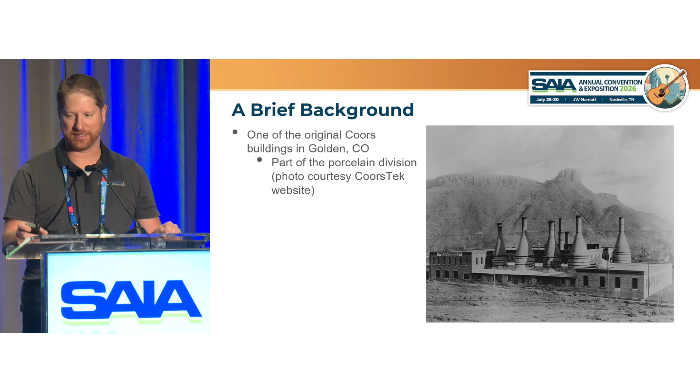So a brief background. So this is one of the original Coors buildings out in Golden, Colorado. They actually did a lot more than just make beer, especially during Prohibition. They had to do ceramics and a lot of industrial materials, things like that. So this is what the building originally looked like. And what the Coors family wanted to do is they were tearing down the building and turning it into a mixed-use kind of parking garage, residential, retail, that kind of thing.

But they really wanted to preserve the existing exterior wall. It was kind of one of the first buildings on the site, and they really just liked the way that it looked. So they kind of tasked us with trying to maintain that as they did all their demolition operations. So this is a joint collaboration between us and JKS Industries. JKS Industries is a demolition contractor based out of Colorado, and they mainly do a lot of bridge demolition work, is kind of how we got to know them originally.

Now they're doing a lot more work out at Coors with demolition plans, but this was a pretty big one that kind of carried a lot of risk with it just because of the historic nature of the building. But working with them for a number of years, they trusted us, and we actually had quite a bit of fun doing it. So here is the main thing.

What was the challenge? In Golden, Colorado, there are essentially two roads that run from the north side of Golden, which is where all the houses are, to the main part of Golden, which is where the downtown, the Colorado School of Mines, and the actual Coors Brewery and the whole Coors complex is located. One of those streets is Ford Street, and Ford is where they were doing all the demolition. The building kind of off to the left next to the green line is what had to come down.

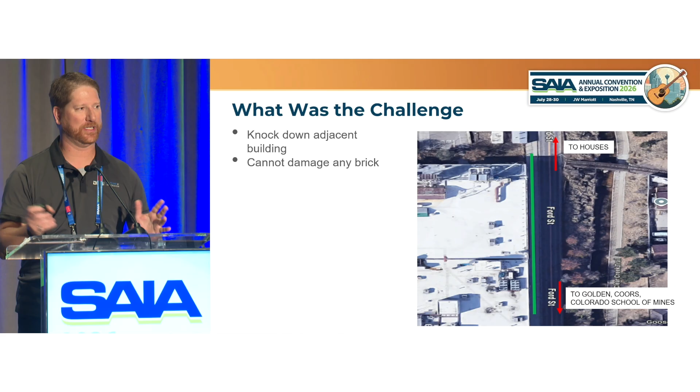So the biggest part is, again, it's a historic building. Coors really wanted to keep the look of it. You can't damage any brick. Everything has to maintain in place. They don't want anything coming out. They don't want it broken or anything like that as they're doing their demolition operations, so the whole thing has to stay in place. It's also got to withstand all types of Colorado weather, and in Colorado, weather changes very frequently, so we have to kind of account for that, especially the wind in Golden.

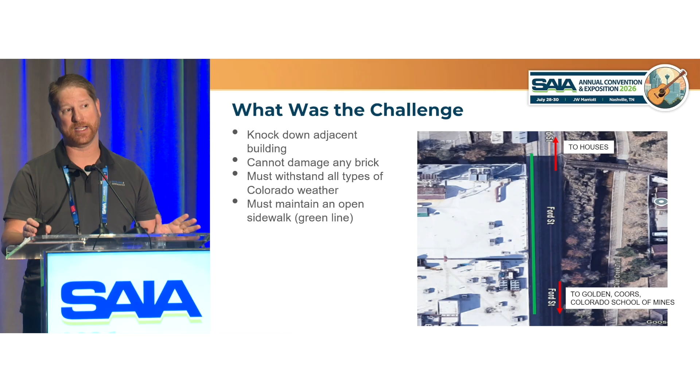The green line is a sidewalk. And again, this is kind of the main way that people that live on the north side of Highway 58 get down into Golden is they walk along the sidewalk. Sometimes, depending on how much they've had, they might stumble back to their house. But we had to maintain that sidewalk open at all times. It's also a 2-lane road, so we can't really have anything that encroaches out into the road.

We also can't brace to the inside of the wall because that would have been way too easy because they have too many other operations going on inside there. Even if it was just demolition, we probably could have done something to account for that, but they had too many other things with constructing the new building, so we couldn't have anything on the inside.

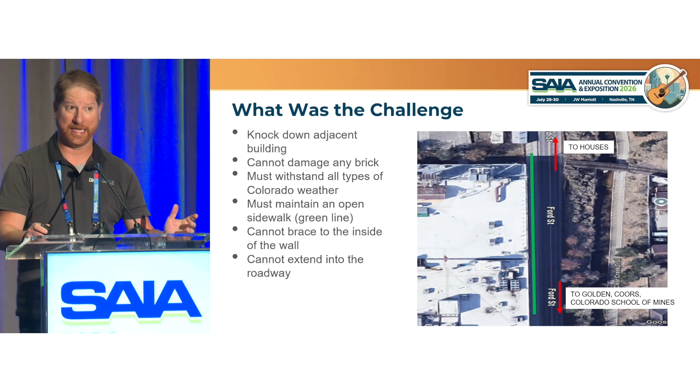And again, you can't go out into the roadway. So here is basically how the project looks. You can see it's just what I would consider kind of a simple brick wall with a Coors name up at the top of it, but they really, really wanted to keep it.

So again, it is kind of a narrow 2-lane road, and then you have the sidewalk on the left side that's adjacent to the building that had to stay open at all times. They couldn't close that down, otherwise it was going to be a main issue.

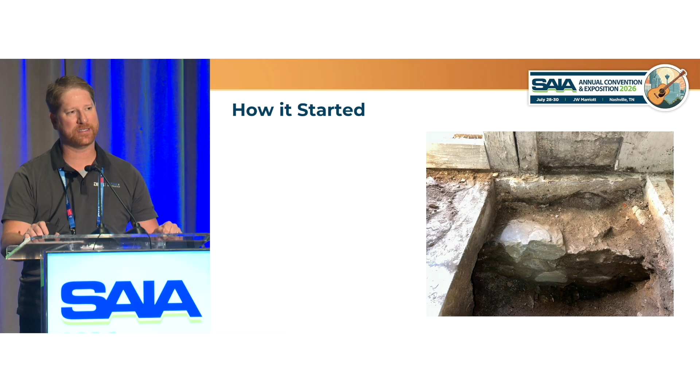So how it all started for us is as JKS was getting ready to do some of the demolition, they started taking out some of the slab on grade and said, uh-oh, we have no idea what this is. It actually turned out to be large cobblestone foundations. Wasn't concrete or anything like that. It was big rocks, and nobody really knew what to do.

So they called us up to say, hey, how do we at least kind of get this thing stabilized and make sure that it's not going to come down as we start pulling down the rest of the building with it. So that's really what kind of kicked off this whole project for us, is to look at the foundation, and then it kind of became, what do we do with this wall?

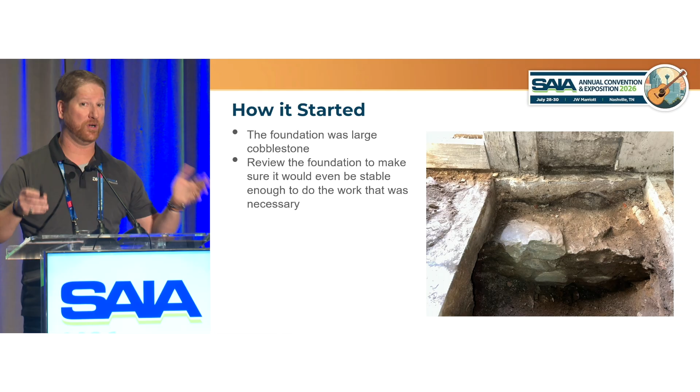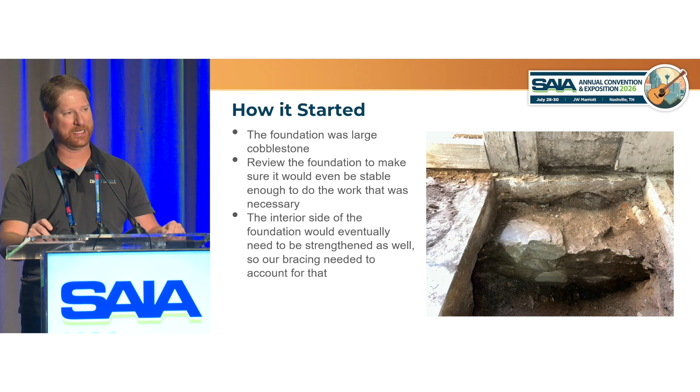At one point, one of the ideas was actually to cut the wall into sections, truck it off-site, bring it back to the site, and put it back up in sections almost like precast. We decided that was not a good idea, so we went with bracing. Again, the inside of the wall, because of this cobblestone, needed to be strengthened. They were going to add grade beams and additional foundation elements after the fact. So again, we couldn't have anything on the inside to get in their way.

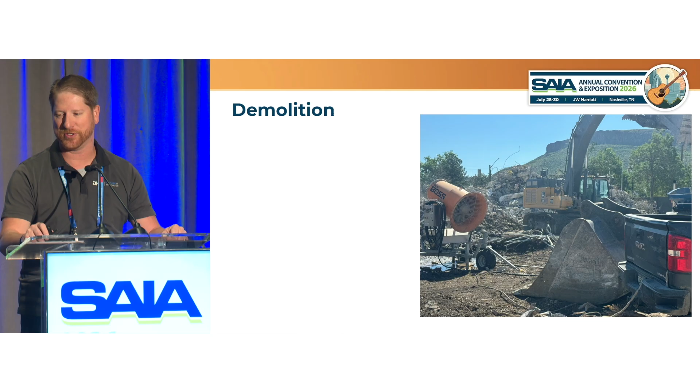So the demolition, the fun part. JKS, again, they do bridge demolitions. They like to be surgical. It's essentially just giant excavators with buckets and shears and hammers and things like that. So all of the demolition was performed from the inside of the building using all these large machines. There was nothing small out there whatsoever. Everything was done by very skilled operators using the large excavators on the inside.

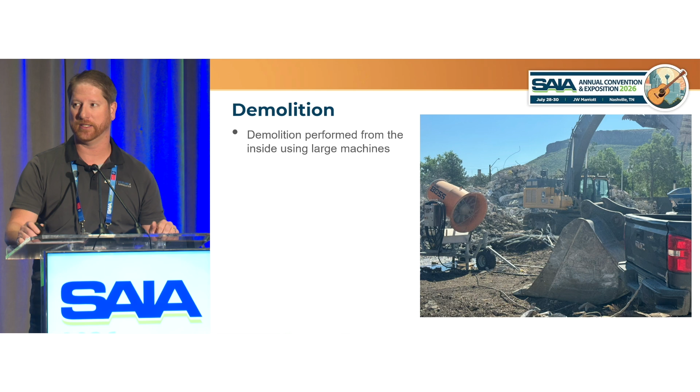The way they did the building is the reverse of how they built it. So they demoed it from the top down. They didn't want to try to pull columns from the bottom and kind of let it come down. They wanted to basically take it apart piece by piece from how it was originally built.

And part of that also meant they had to pull out a lot of the main support beams that ran into the pockets of the brick wall. So they were very, very careful pulling them to make sure they didn't pull the brick with it, because, did I mention, you can't disturb the brick wall whatsoever.

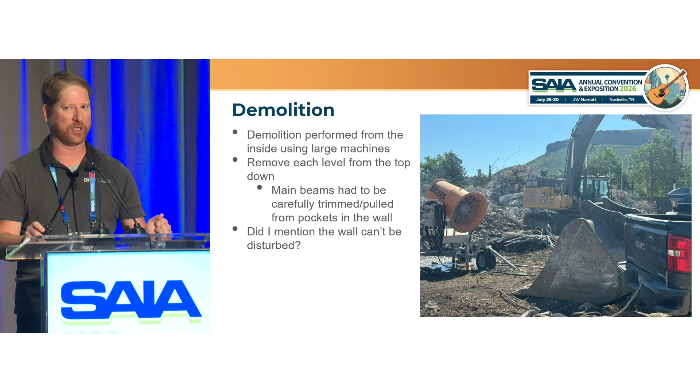So the way we approached this is we started by making sure the wall was actually secured. What we did is, with a 100-year-old brick building, we essentially designed a steel exoskeleton to go on the outside of the wall. We used steel beams, just I-beams vertically, and then for the time being, we had timber members with coil rod going through there to essentially squeeze the steel members on the outside and inside of the wall, creating a bit of an exoskeleton.

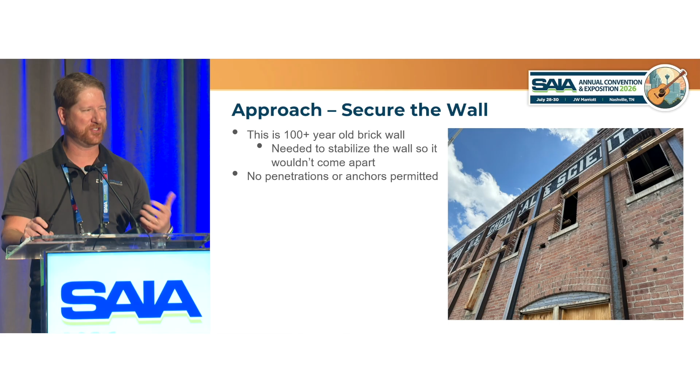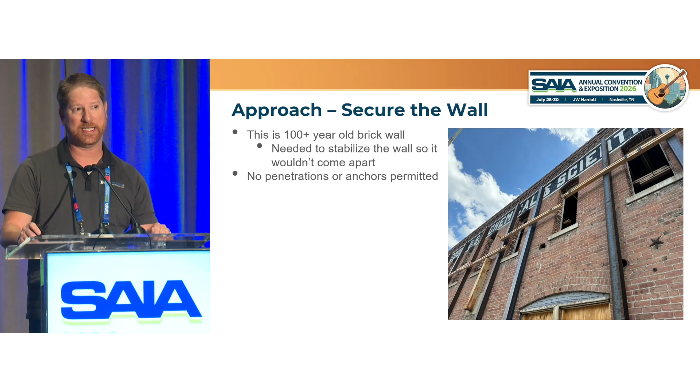Part of it too, they didn't want any penetrations, no kind of anchors into the wall, because again, they didn't want to have to go back and try to fix something when they were done. So the nice thing about this building, there's lots of windows, lots of door openings. So we were able to get quite a bit of coil rod to go through without having to actually drill through the existing wall.

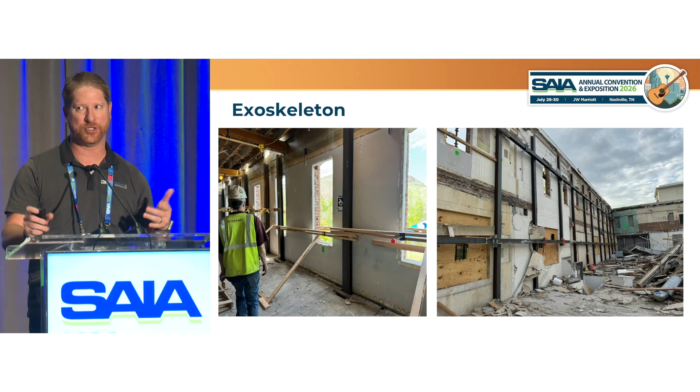So again, we had all these beams out there, and then this is eventually what it looked like. So what we started with was kind of the picture on the left. While the building was still standing, they cut open holes in the roof, dropped down these vertical steel beams, kind of held them in place with timber and some coil rod, and then you can see in the picture on the right everything is demoed out, and we have horizontal walers going through there as well. Everything is connected, so it's all actually functioning as one giant piece of wall without the rest of the building around it.

So what we decided to do is essentially use system scaffold, and we created another almost mock building on the outside that we could start attaching everything to. So the nice thing about it, the sidewalk was extra wide. I think it was about 10 or 11 feet wide, so it worked out really, really well for us to get everything in there. I will say with the final layout, everything was pushed basically right to the edge of the curb, which is where they had that vehicle barrier.

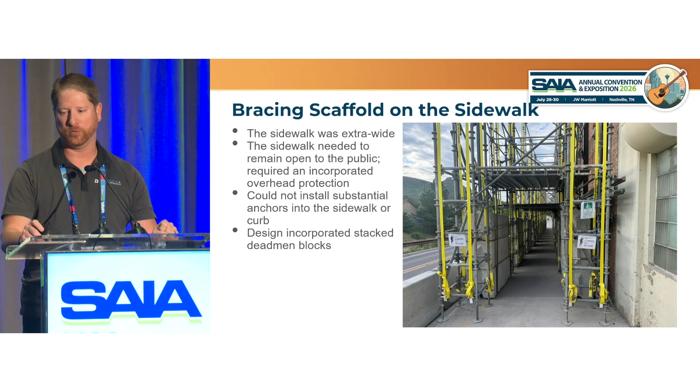So instead, what we used was stacked dead men concrete blocks. So on the inside, there's 3 blocks on each side. They brought them in on a truck, unloaded them with a forklift out in the road, and then basically sent the truck on its way, again, to try to minimize any kind of street closures. So everything had to be done very, very quickly and set into place.

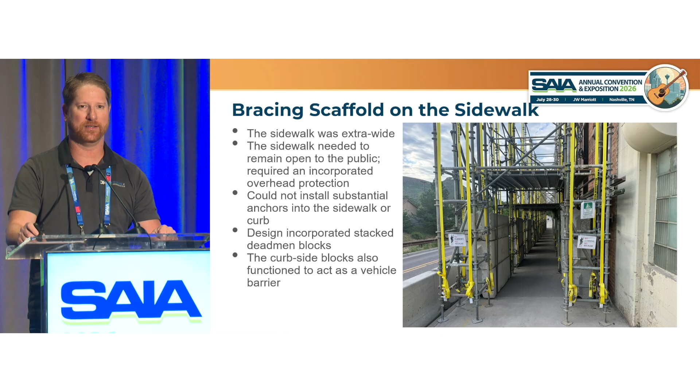And then the nice thing is that even though they had this K-rail on the outside, right up against the gutter of the curb, all these dead men blocks also acted as a vehicle barrier just in case somebody got a little sideways, and they didn't want somebody running into the scaffolding to tear it all down because it's also still actively bracing the wall and didn't want to have all of it go with it.

So it kind of ended up looking like a giant jungle gym of not only scaffold parts and pieces, but a lot of straps. So the other thing too is they used the straps to hold down all of the dead man blocks, because we ran some numbers and found that having all of that concrete weight at the bottom of these things was probably going to do quite a bit of damage to the runners. So we said, okay, we'll set them on the ground and we'll just run straps around everything, run them to the tops of the legs, so that way all that load is still concentrated into the legs and the runners are really just acting to space everything out.

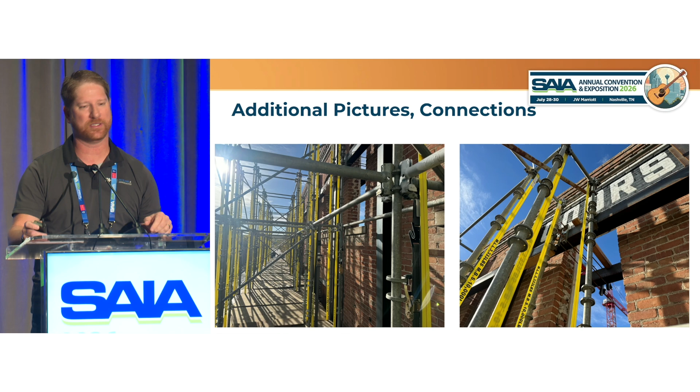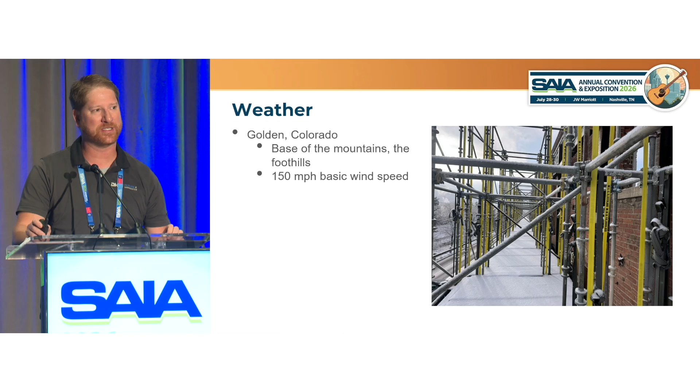Again, with Golden, Colorado, it's at the base of the mountains in the foothills. It is in a special wind region, so almost that one street, Ford Street, has 150 mile an hour design wind speed to it. Go 1 block over, it could be 160, but that's what we were dealing with for the time being. There were a number of days that we had sustained winds over 70 miles an hour for the whole day long. We'd get gusts over 100. So yeah, that's what happens in Golden, that part of the town, especially in the fall and winter time, is you do get a lot of wind.

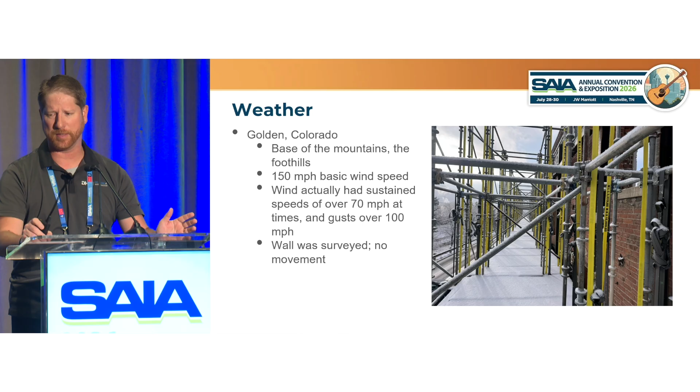So what the contractor wanted to do, again, to make sure we can't disturb the brick, is they went out and surveyed before the weather got really bad. Took a number of shots, before and after wind events, and everything we were told is that nothing ever moved. Everything stayed right in place. They didn't lose any bricks, didn't create any new cracking. So the scaffolding provided plenty of rigidity to not allow that wall to flex.

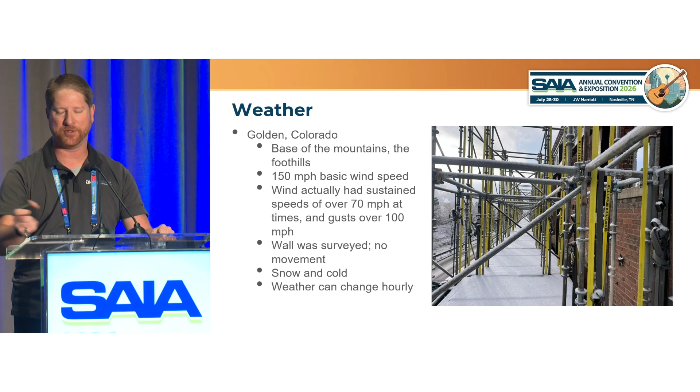So again, dealing with a lot of the snow and the cold. Probably by that afternoon, a few hours later, it was sunny, the snow was all gone, and people were walking around in a t-shirt.

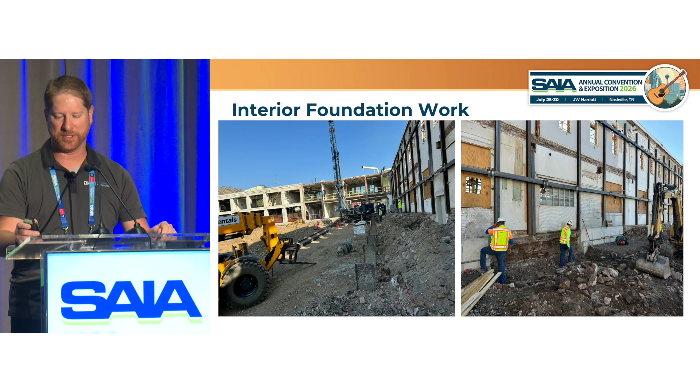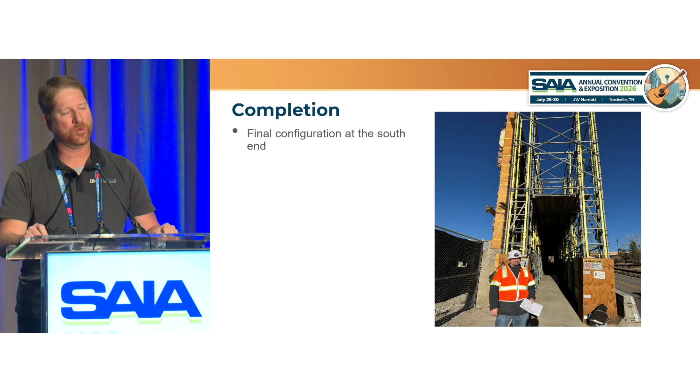And so when all was said and done, this is John Heiser. He's our engineer that designed this whole thing. This was a great picture for me because he was just so proud of this. I had to go out there a number of times and just tell him how happy everybody was with the project. But you can see at this point, there's no more building. There's just a wall. So this is the final configuration at the south end. Because of the way the road tapered down and sloped down, it was about 30 feet tall, give or take, at that one end, with both the brick and also the concrete foundation.

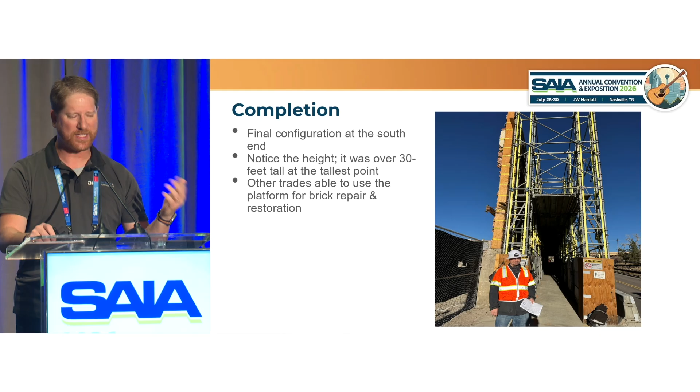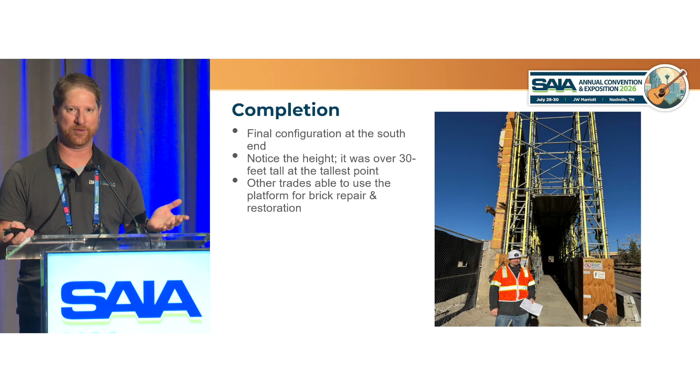So we realized that if we tried to do tilt-up braces, again, they'd be out in the middle of the road. So by using system scaffold, we can just keep building all on top of itself and brace it really well. And the other nice thing is we were able to allow other trades to get up on the scaffold and do the work that they needed to do, because they didn't want to shut down the sidewalk to allow boom lifts and things like that. Well, now we still have an overhead protection design, and we can also have other trades working on top of there.

The main thing from our end on a design standpoint is we just had to say, okay, because this is still rated for wind loads, if you're going to have people up there, it's going to add to the load of the scaffold. So don't put anybody up there over X amount of miles per hour, and say, 1 or 2 people per bay. So we tried to give them a bunch of different options of how to use this, so that way they wouldn't have to tear it down and bring in other equipment. We tried to make it really beneficial for the project as a whole.

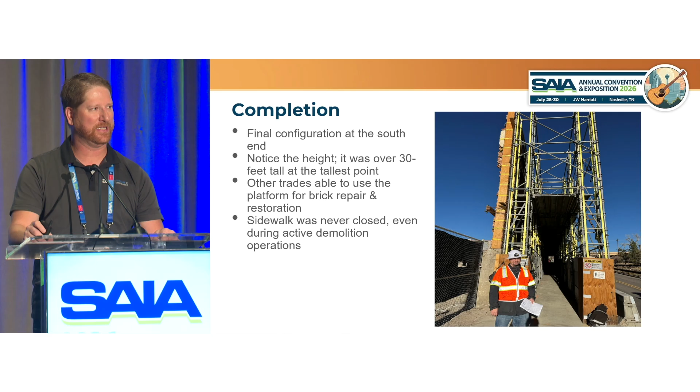The sidewalk was never closed. So even during active demolition operations, it was kind of hairy sometimes to see the giant excavators on the inside pulling out timber and everything like that. But if you were on the sidewalk side, you wouldn't have known the difference. So everything still stayed open. People were able to ride their bikes up and down the sidewalk. And so it was one of the best things for it.

And all the equipment, none of it was really custom made. Everything was all just prefabricated system scaffold components. The steel beams were basically what the contractor told us: this is what size we have. Okay, we will make it work. So that way if they ever ran out of something, it was easy to get more of it, and made it real simple for them to erect it, dismantle it, and then have a nice beautiful wall when it was done. So that's our wonderful Coolers project. We're very proud of it. It does look really nice, especially since they went through and I think acid washed or cleaned the walls. So now with the new building on the inside, it looks substantial. Any questions?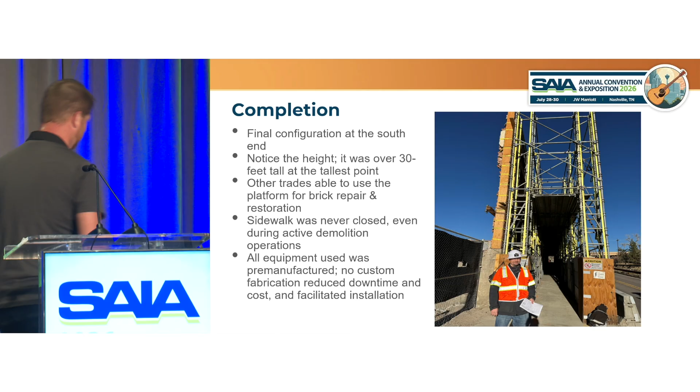All right. How's that? All right.

Good afternoon. My name is Mark Palmatier. I'm an engineer at DH Charles Engineering. And for the Commercial Collaborative Award, I'm presenting on the Tomochichi Federal Building.

So a little overview on the project and the building itself. The Tomochichi Federal Building is located in Savannah, Georgia, in the historic district of Savannah. It was originally constructed in 1890. And it was originally designed as the nicest post office that you've ever seen. But eventually they converted it over to a courthouse, and it's operated in that capacity for over 100 years.

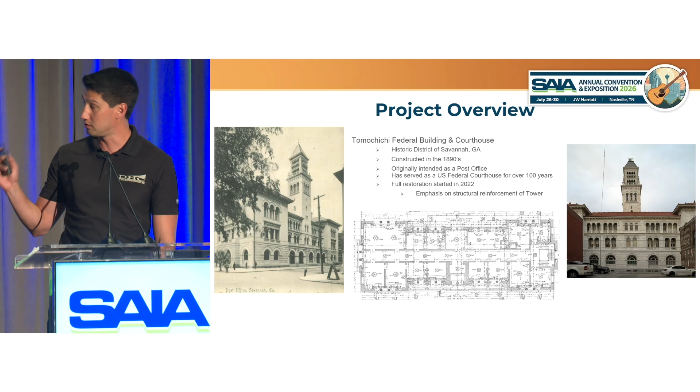The facade consists of granite stone with symmetrical columns, and it's an excellent example of the Renaissance revival style that was popular in the 1800s. It's for this reason that it was added to the National Register of Historic Places and deemed worthy of preservation. And in 2022, it underwent a full rehabilitation.

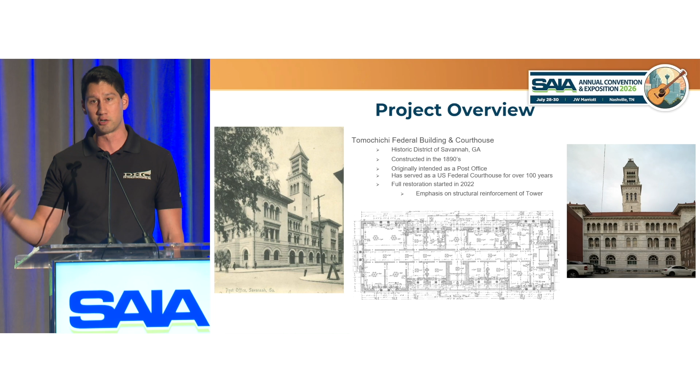So work went on throughout the building, but our main focus was on the tower structure. The work on the tower consisted of a full restoration of the facade completely around the tower and all the way up to the slate stone roof, which is 140 feet above the sidewalk level. In addition to the exterior work, new reinforcing steel was to be installed inside the body of the tower, meaning that steel beams had to be brought up from street level, staged, prepped, and then brought into the tower.

Right out of the gate, there were a lot of challenges with this project. The first big one was we are located in the heart of a Civil War era downtown, meaning very tight streets, no room, historic buildings all around, so even figuring out where we were going to put scaffold was difficult, much less providing any sort of lay down or work yard.

The second big thing was that this building was old, meaning we weren't sure what it could support, what kind of capacity we could get out of it, and so wondering whether we could even interact with the structure at all was a big question.

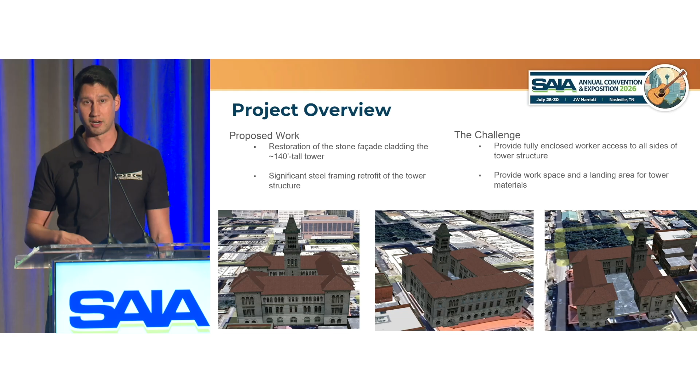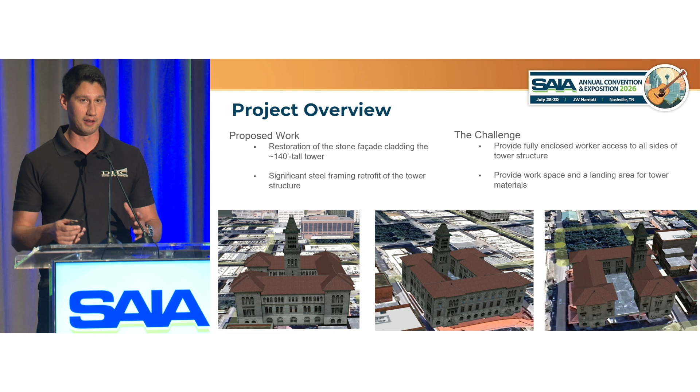The last big thing that we really needed to do was make sure we got everybody on the same page. Not only the people we were designing with, but also the general contractor, and coordinating closely with the owner's reps and the engineer of record on the building to make sure we all understood what we were expecting out of the scaffold, what kind of design parameters we needed to meet, and making sure we had a smooth design process all the way through.

So a job of this complexity would just be absolutely impossible without clear communication and good collaboration. And so it's for this reason that we were really happy that we teamed up with the Tradesman Group and Universal Manufacturing. They were the core design team on this project. The Tradesman Group was the restoration specialist and the ultimate end user of the scaffold. So we were able to talk directly with them, understand exactly what they needed out of the scaffold, and design for the parameters that they needed.

Universal was critical in ironing out the initial design work. They worked closely with Tradesman, put together the conceptual designs that we were then able to take, fine-tune, and put into the final working plans. So after a few months of working with the core group, as well as coordinating with the GC and the owner's reps, this was the final scaffold design.

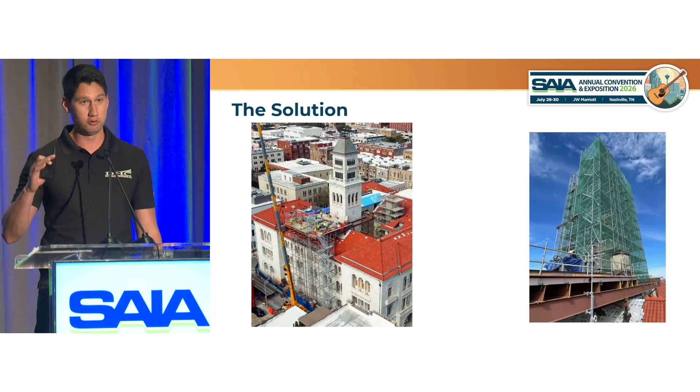So ultimately, it's a comprehensive system that provided both the worker access to the tower as well as a work deck for the work. But really broken down, it's actually two designs that have been structurally integrated to be as efficient as possible. Most simply, it can be broken into the tower scaffold and then the platform structure.

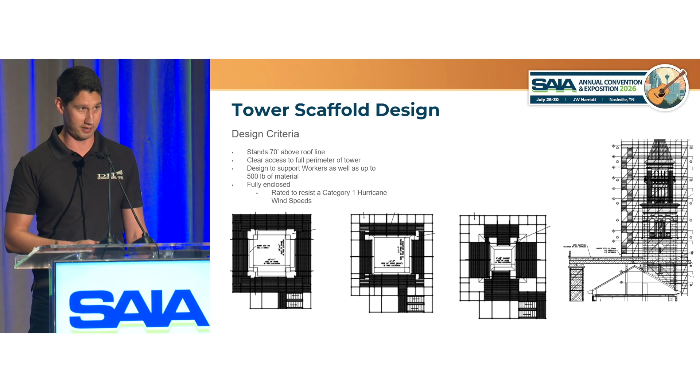So the tower scaffold used the platform framing as a foundation and then extended up 70 feet from there to reach the top of the 140-foot tall tower. It was designed to wrap completely around the tower, be fully enclosed, and then utilize the tower structure as the lateral support system. Because it was fully enclosed, we were required to design for a 90-mile-an-hour wind speed in case anything happened. That is analogous with a Category 1 hurricane. That is going to come up later.

So as the scaffold increased in height, it stepped in to allow workers close in access to do the fine, detailed restoration work they needed to do. It was designed for a typical light-duty worker live load, but also was designed for a 500-pound material load in the event they had to fully remove a piece of stone and replace it.

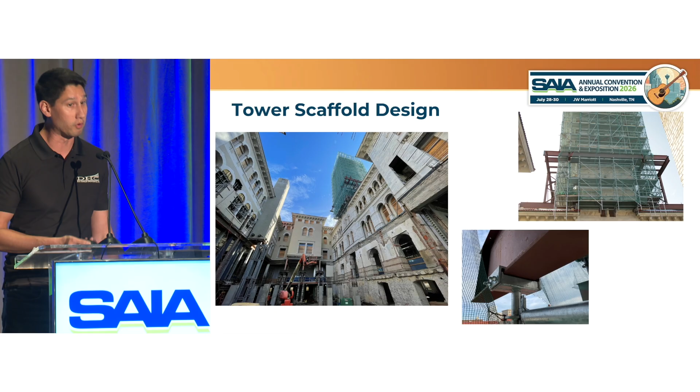Now, the interior courtyard of the courthouse was slated for full demolition and even some excavation, meaning we could not put any scaffold down on the inside. So what we opted to do was suspend the scaffold from the platform framing that cantilevered out beyond the face of the building. We did this utilizing custom fabricated brackets put together by Universal.

Because the overall project was restorative in nature, having as little impact on the structure as possible was key. And this was especially important with the scaffold ties. So what we did is we put together a computer model of the scaffold and induced wind loading so that we could accurately determine how much load would concentrate at each tie.

From there, we utilized compression bump ties where we could, so that we would not have to drill or do any sort of rigid tie to the structure. And then where we did need a rigid push-pull connection, we designed a tie that would maximize strength but minimize how much impact was on the building and how much repair they would need to do on the back end.

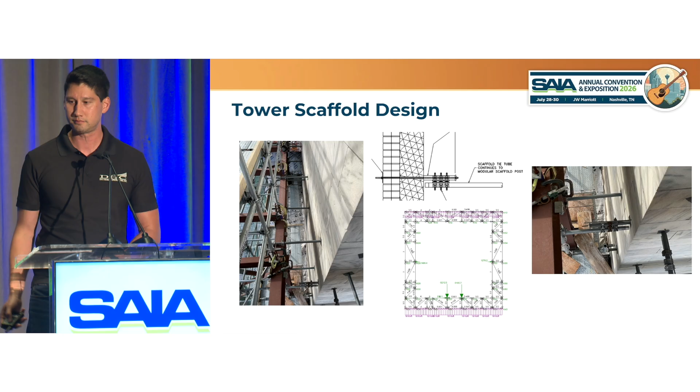So when it came to the platform design, the platform was going to work as not only the foundation for the access scaffold, but also the backbone for the work deck, consisting of 68-foot long steel beams that were designed to be spliced together in the field so they could actually transport these on site. It actually cantilevered out beyond the face of the building on the back side so we could hang the scaffold, and then provided for a 34.5 by 43-foot work deck on the front side.

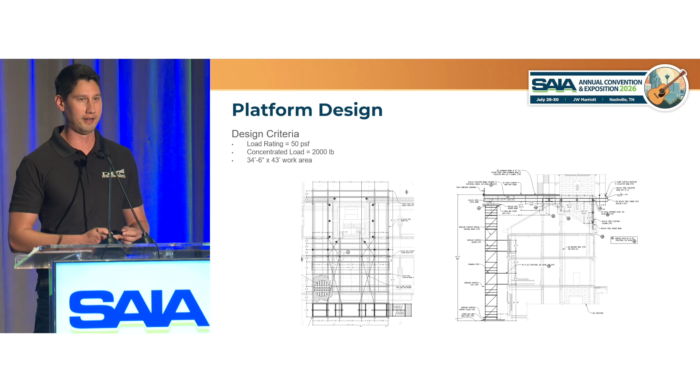The work deck was designed for a 50 PSF workload rating, as well as a handful of concentrated high load scenarios as they would move material up. On the front face of the platform, it actually extended 15 feet beyond the edge of the building. We did that utilizing 24-inch tall steel beams that would be supported by Universal Manufacturing's heavy-duty columns. This allowed us to extend the platform out to the edge of the sidewalk.

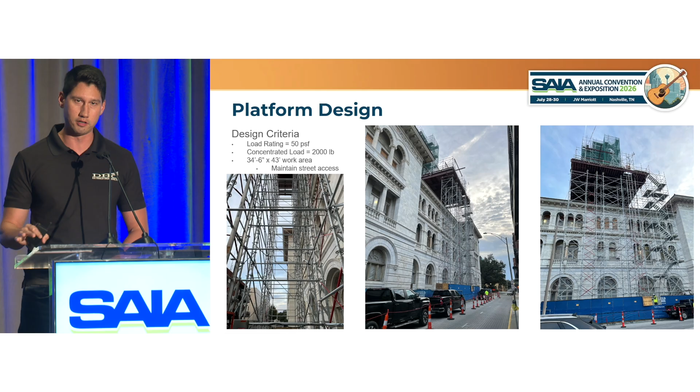This way, they could bring trucks in loaded with steel, park them right on the street, and offload directly to the platform utilizing a hoist. So that way, there was no secondary laydown yard necessary. They didn't need to bring in another crane. It sped up the construction process a lot.

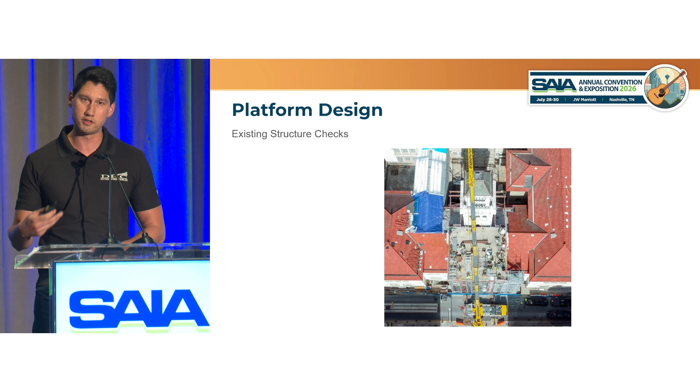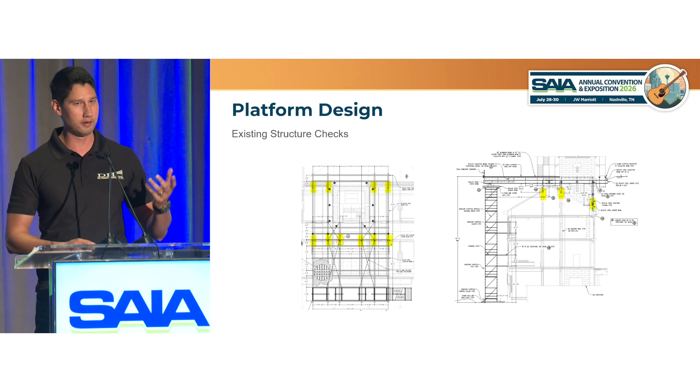So once we got into the platform design, it became pretty apparent that there's no way to give them the space they needed and the load rating they needed without interacting with the structure in some way. So once we got the design parameters for the platform, we took a look, saw where we could and could not support off the structure, and then dove deep into how that interaction would look. And ultimately, we decided to support the platform off the actual existing structure in 12 different locations. 10 of them were a column type support, while 2 of them were a pocket type bearing point support.

So the column type supports were designed to go through the roof structure and tie in directly to the masonry walls below. These columns did not just bear on it, but they actually bolted in and locked in. That allows us to use them for both vertical load as well as resisting lateral load. At the tower structure where that was not possible, pockets were actually opened up in the tower wall, and then we were able to slide the beams in and just bear directly on the wall itself.

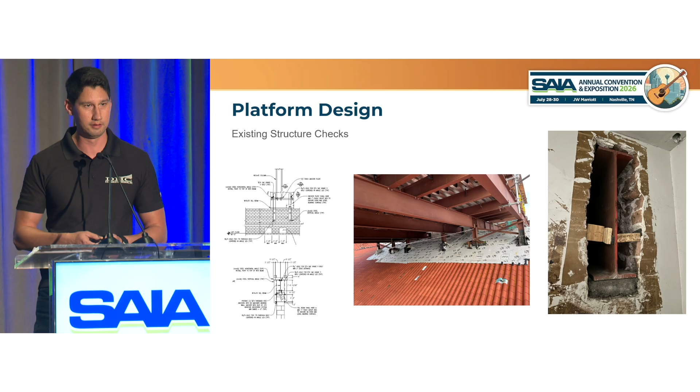So once we figured out how we were going to sit on the building, we had to determine whether we actually could sit on the building. So D.H. Charles was tasked with checking the adequacy of the actual courthouse to support these vertical loads. This was not easy. We had to not only dig through 1800s era as-built plans to figure out what this thing was made out of, but we actually had engineers go on site, walk the entire building, following the platform load paths to make sure we had a clear understanding of the current status of this 130-year-old building.

Where there were no clear specifications on material strengths or anything on the plans, we had to actually do research and find references for what a typical strength for that material was. And then using our engineering judgment, worked with those capacities to check the structure.

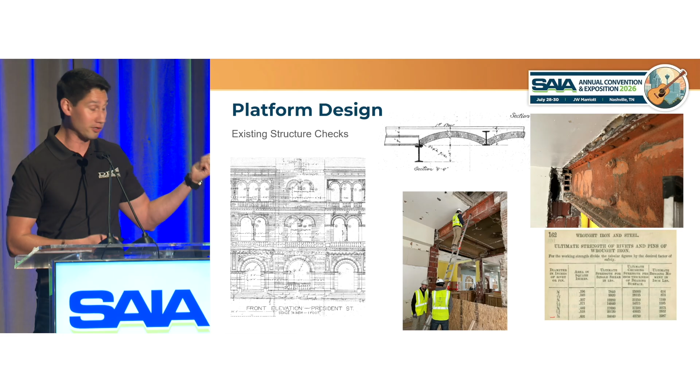One fun fact about this building is, if you look here, that is a cross-section of the typical floor. They made these floors out of terracotta tiles that were then stacked into a compression arch. They did that because when this building was constructed, reinforced concrete didn't really exist yet. So this was how they actually created floors between steel beams. It's also the reason why we didn't interact with any of the floors at all and went straight to the walls, because I'm not messing with that at all.

So for the 24 hours that it was passing through Savannah, I did not get a lot done. I just refreshed the Weather Channel page a lot. But when the storm passed, they did a full review of the platform. It worked just as we designed, and I could not be prouder of either the design or the team that helped put it together.

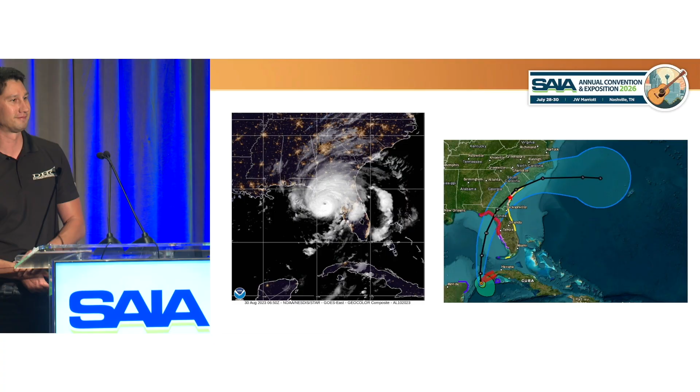So at this point, I'd actually really love if Tony and Chris came up with Universal Manufacturing, because this is a collaborative award, and we just couldn't do it without them. Nice presentation.

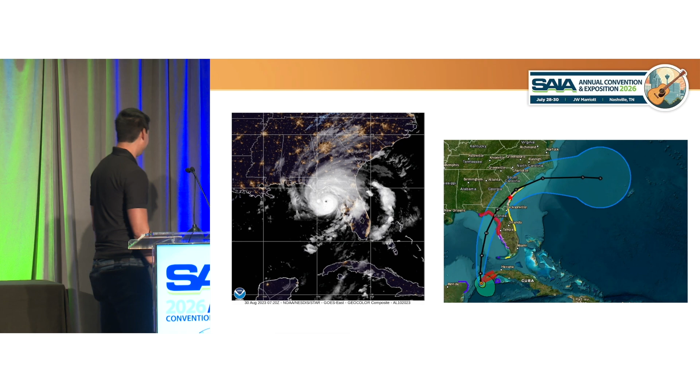So that's pretty much everything. If there are any questions, we'd love to take them. Very cool. Thank you very much.

Good afternoon. I'm David Johnson with Skyline Scaffold, and I'm going to talk to you about our PG&E Tower 320 demolition project, which was the 2025 Industrial Collaborative Award winner. We're collaborating with D.H. Charles, who's our engineer for most everything we do, and we really appreciate them doing exactly what they do for us every day.

Here's the call we got. First of all, Skyline Scaffold is an approved contractor for Pacific Gas and Electric, and we do a lot of work with utilities, but PG&E has got a pretty rough indoctrination program. It takes a lot of training and a lot of time; we've got to know how to not run over desert tortoises. It's a very complex set of training. We had lots of hurdles and trainings to be completed before we got on site, and those being completed allowed us to respond very quickly.

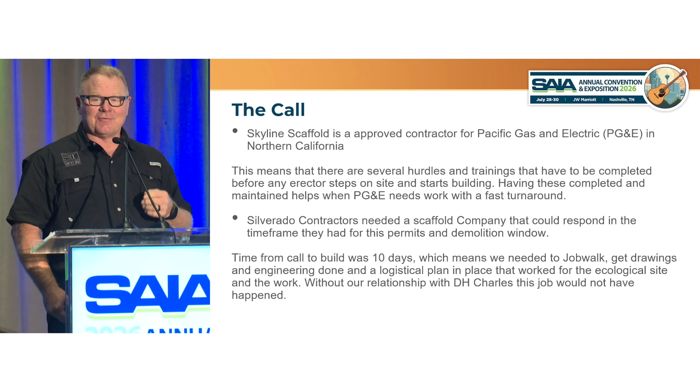And I've got to say, without our relationship with D.H. Charles... My estimator, Joey, walked in the office covered in marsh mud, which I'm really not sure what's in there, and called Robin Coe at D.H. Charles, and they were in immediately. Here's the location. It's in Antioch, California, and this is an ecological wetlands project called West Island. There are several PG&E transmission towers on West Island, and this one had been decommissioned and was ready to be torn down.

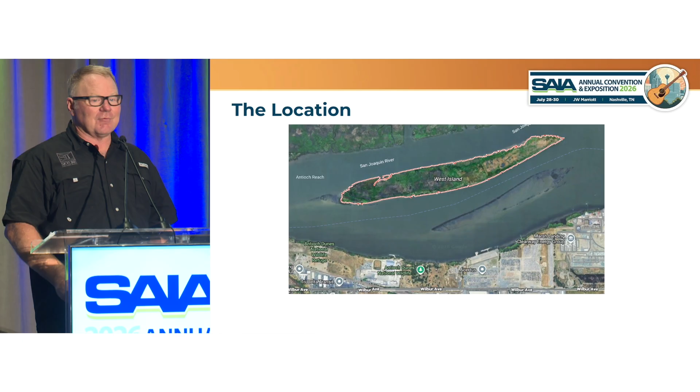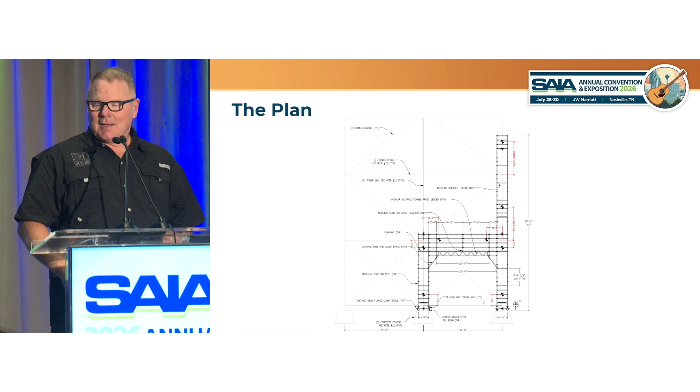D.H. Charles and our team came up with a plan for towers on both sides of the platform to allow for the placement of demolition charges so that we would be able to do a controlled demolition taking this tower down. We knew we were going to be tight on time, so we brought in our heavy hitter crew. These are the most beast-like human beings you will ever meet. They are big and burly, and when something needs to be absolutely destroyed overnight, that's the guys we send.

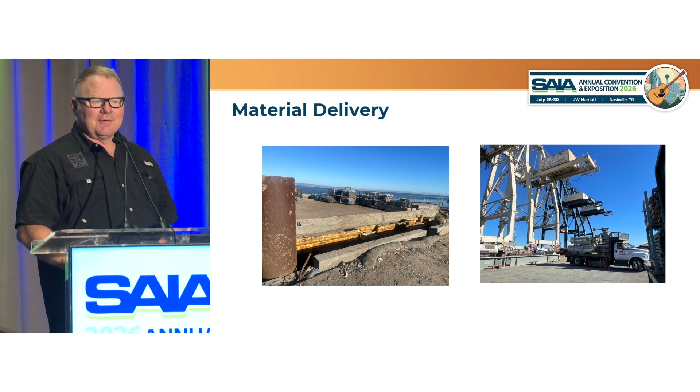Material delivery involved putting everything on a barge. We went to San Francisco to Pier 97, put all of our scaffold on the crane and then on the barge. When it got to the island, an excavator team put all of our scaffold on big crane mats they had brought in to keep everything from sinking, and then we were able to get to work. The erection process took 2 days. A lot of careful planning, making sure we had everything exactly where the demo team wanted it, and a lot of conversations about exactly where the placement was going to be.

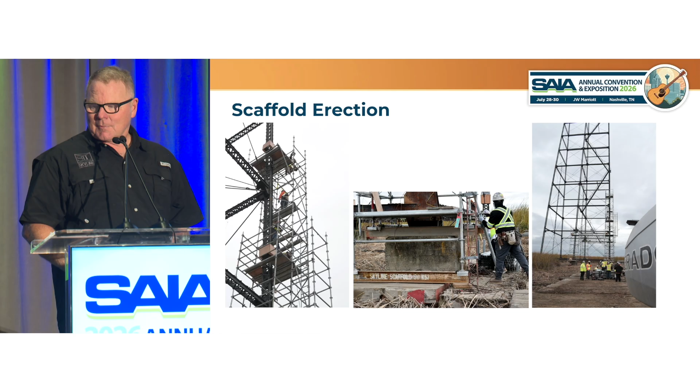The demo team came in, while we were on site on standby mode, waiting for them to finish up. They placed 9 pounds of demolition, which is not a whole lot in the scope of explosives. After that, we had 4 hours to tear everything off because we had a window at 4 p.m. that had to be met, or we would have to reset for the next day and remove all the demolition charges.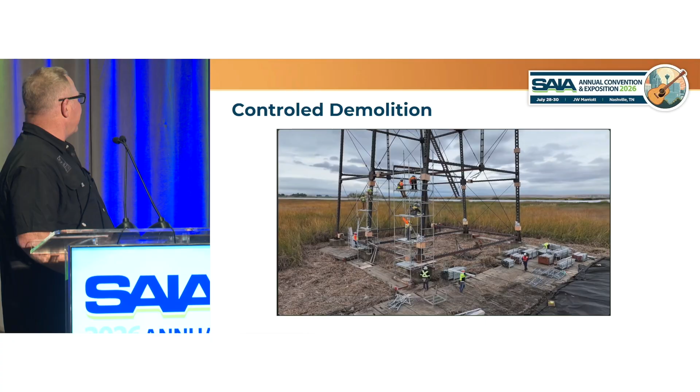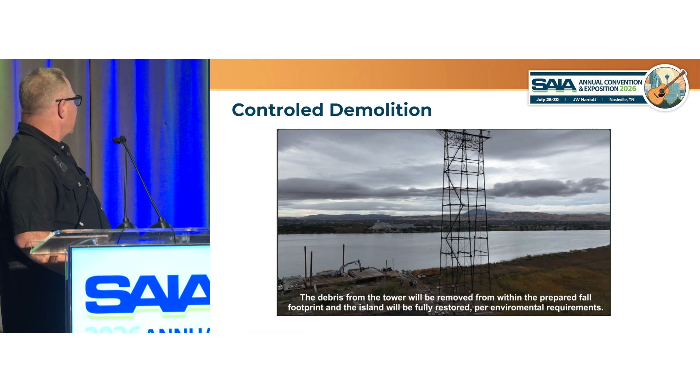Here you can see the tower as it stands, and the barges that we brought everything in on. This is our team, I think actually in dismantle mode. All those plywood boxes you see in all those places are the demolition charges that were placed. And since this was such a sensitive ecological area, we couldn't bring in large cranes and stuff like that.

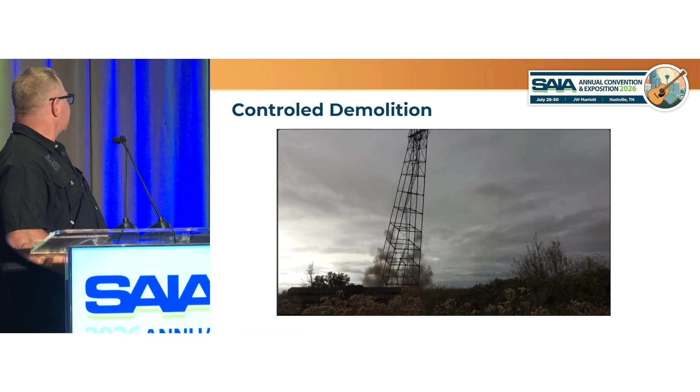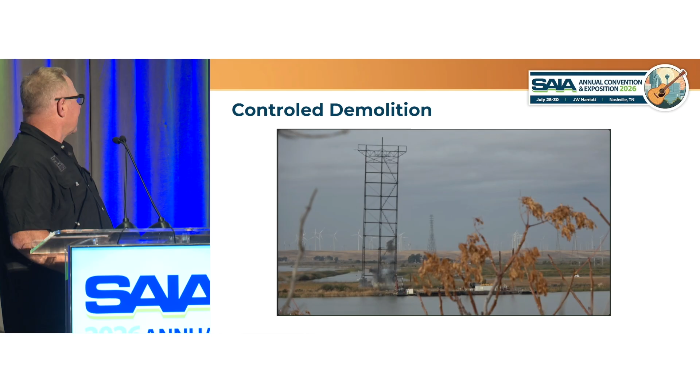And this is what she looks like. It fell perfectly into the prepared area that we expected it to be in. You can see all this matting and netting that they put out there, and that is where they had to remove by hand all the cord grass and other ecological stuff.

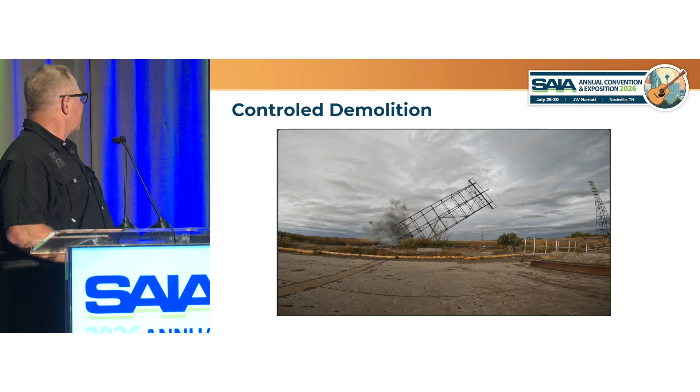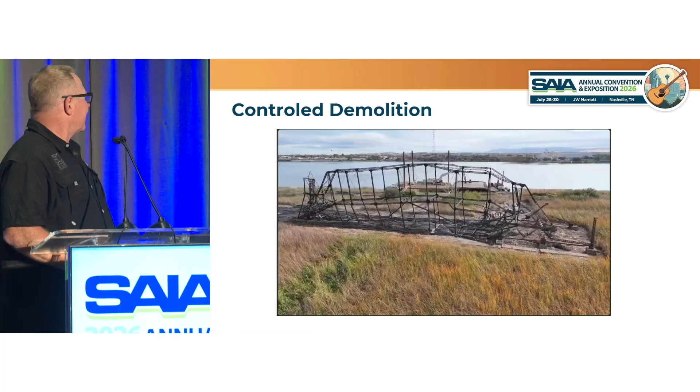And here's the result. This meant that the team from Silverado Demolition could go in with some of their smaller excavators, cut this thing up, and remove it off to the barge.

In the end, I love this project because not only is it just plain cool, we don't get to see demolitions a lot every day, but it really showed our relationship with Charles and our team's ability to respond to a really tight timeline that involved a whole lot of not normal logistics. And so I really appreciate the team from Charles and my team for what they did to get this thing done. Any questions for me?

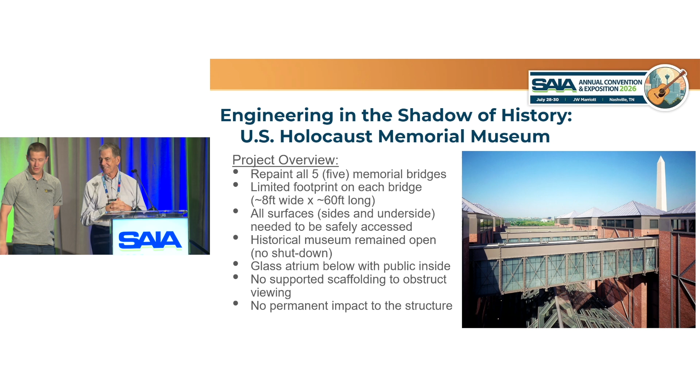So, yeah, when Roger called up, he had a lot of different issues, if we want to call it. Nothing was kind of normal for this project. We had to figure out how we were going to provide a platform to access both the sides of these walkways along with the underside of it. So that sounds pretty okay. That's easy to do right off the bat. However, these walkways weren't very wide. And so the way that we would normally do that, you just couldn't do.

Because you couldn't actually pick up a platform, move it out, lower it down, and then be able to access the underside. Along with that was the fact that there's a glass atrium underneath. So now all of a sudden we had a lot more issues at hand. We wanted to make sure that nothing could fall down below. We had to make sure that how this platform was going to be erected was safe on the original putting it together. So how were we going to do all of these different things?

So overall, what we planned to do is build up a platform, a scaffold up top, on top of the walkway, and then have some cantilevers off of that scaffolding to erect the actual platform itself. Pick the platform up slightly, remove those little outriggers off of the platform, lower the platform down, and then create another brand new platform connecting the 2 platforms on either side of the walkway. We've done it before, but not with a glass atrium underneath.

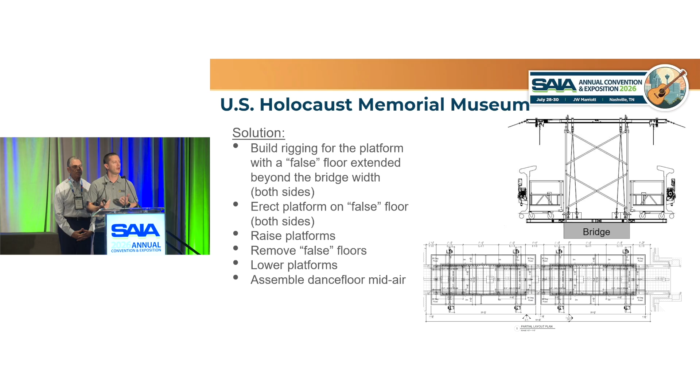And so there's a lot of different things that we had to look at and make sure that everything was tethered, right? Make sure that nothing could actually fall. Make sure that all these plans were correct right at the beginning to make sure that, all right, the distance in between the 2 suspended platforms, now you can actually connect in between with plank and make sure that that doesn't try to separate midair. So how do you do all of that? Different stuff we had to look at to make sure everything was spot on.

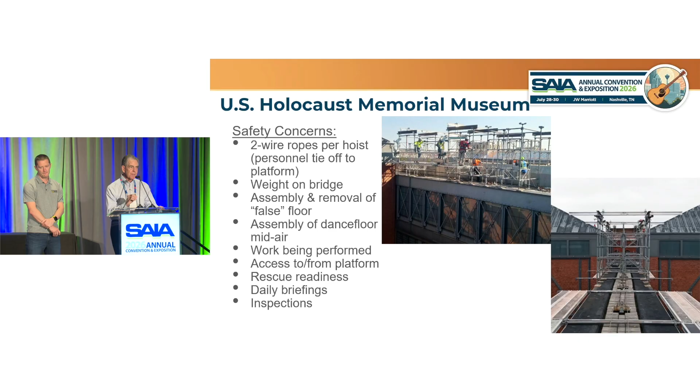Well, in almost everything we do, safety is always a critical and important priority. The museum is a record of a very difficult and horrible set of events that happened against a race of people in our past. Recording and preserving that was really important and is why the museum was put there in the first place. So there was an element of reverence and responsibility in our work there, and the museum had to be fully operable and open during the entire project period.

And so underneath those bridgeways, and under that glass atrium, an entire population of visitors was present at the same time. So managing that safety and that risk was especially critical. One of the things our company does is a pre-job launch event called Day Zero. Day Zero is when we gather the critical stakeholders who are going to deliver the work and go through the briefing details of the project: what we have to accomplish, what the risk factors are, the specific means and method steps we anticipate, and more importantly, how we're going to do it.

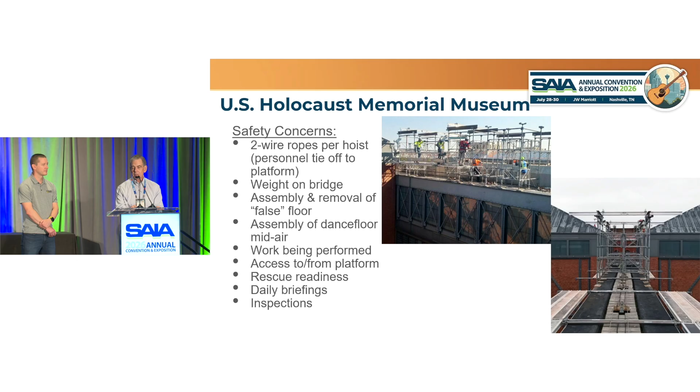And we spent a really significant amount of time on this job, even though it was only five 60-foot long by 8-foot wide bridgeways. The risk and the project itself was critical. And we are really proud of what we accomplished with our team there.

You got the next one?

We completed the work without incident, without a problem. Our customer was able to put as many as 15 workers on those platforms at any one point in time to accelerate their work and meet their project schedule. The structures had no repair, no painting, no maintenance whatsoever for 30 years from when they were originally built.

So this was a really critical and important project to avoid moisture ingress and leaks, and then to paint the structure to preserve the quality and caliber of the steel, as well as the aesthetics for visitors looking up through the atrium glass to these bridge walkways. And incidentally, each of those bridge walkways was named after a specific concentration camp.

So why was this project really successful? The main reason, I feel, is that everybody got involved right at the beginning. Right when Roger and the team realized, okay, we've got to talk to B-Access and figure out how we can do this and who needs to get involved, the entire team got together and figured out all the requirements for the project first. Then we went into, all right, what's the solution? How can we solve this issue and gain access to this bridge?